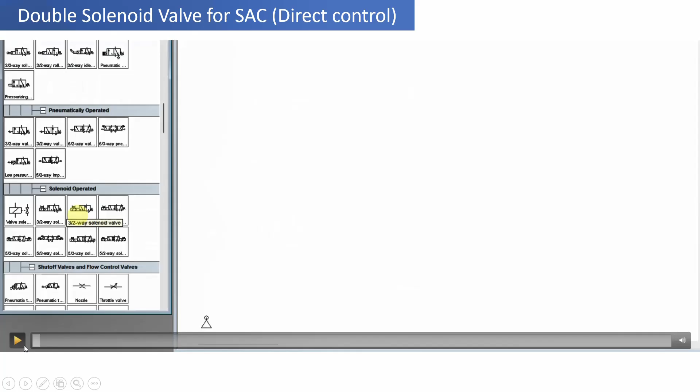So we are having compressor, then 3/2 direction control valve, and then the single acting cylinder. Now left envelope mode is also solenoid controlled, and right envelope is also controlled by solenoid. So it is known as the double solenoid valve. Now let us start with drawing the circuit, pneumatic circuit as well as the electric circuit. Compressor we have already selected.

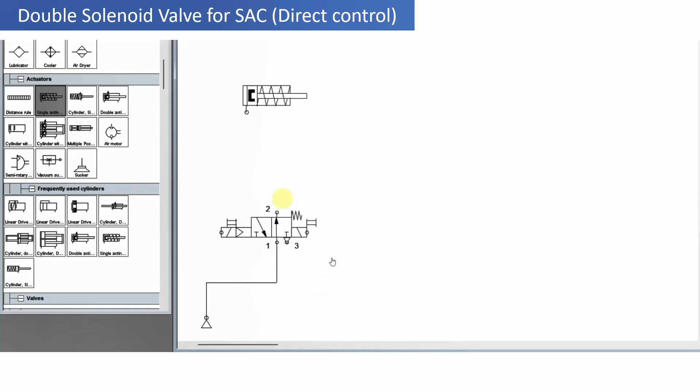Then we are having 3/2 direction control valve. Now we'll configure it in such a way that both the left and right envelope mode will have the solenoid and manual control configuration. Now select the single acting cylinder and then connect the ports as shown over here. So that will complete our single acting cylinder double solenoid valve circuit. Give the names Y1 and Y2 to the respective solenoids.

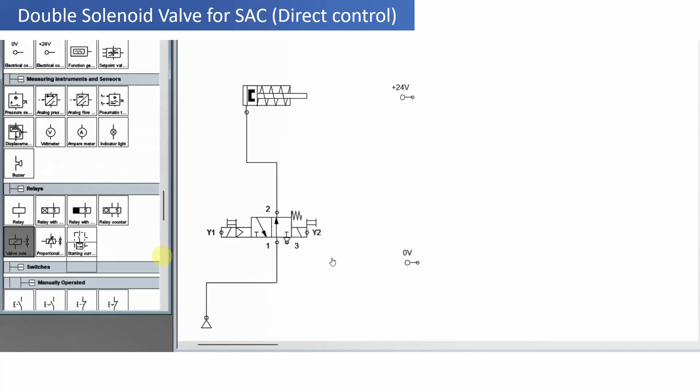Now we have to draw the electric circuit. So we'll select power supply elements as usual. Then we'll select the solenoid valve for both the operations of Y1 and Y2. So we'll give the labels Y1 as well as Y2 to these both solenoid valves, as you can see. Then we'll select the switches also for this solenoid valve. So push button switches are selected.

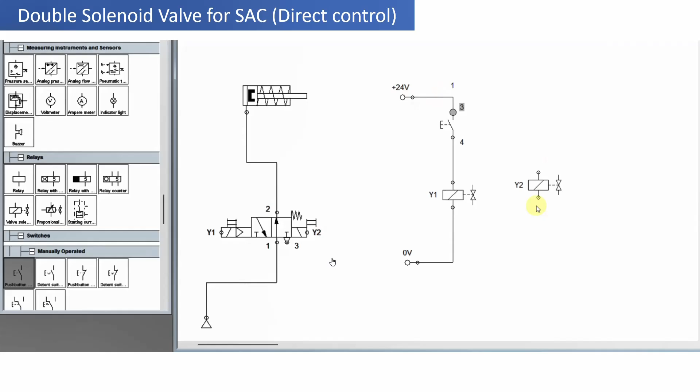Connect to the power supply, then the switches, and then again to the power supply. Same way, you have to select the switch and then make the connections as shown over here. Now we have to name the switches. So start switch S1, then start switch S2. S1 is for Y1 and S2 is for Y2 solenoid as indicated in the circuit also.

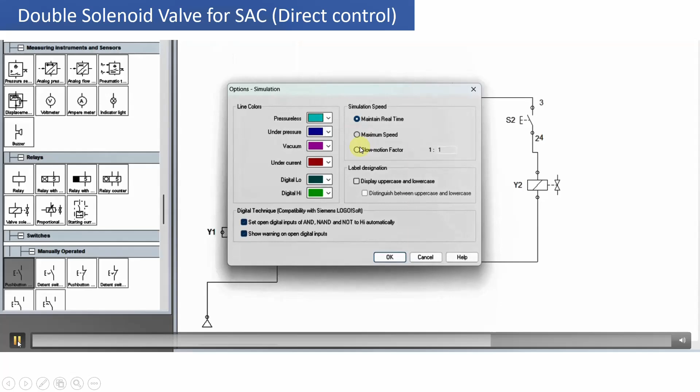Now we'll simulate this particular circuit. So as you can see, we'll change the slow motion factor so that we can observe the simulation properly. Now for this particular right envelope mode, the compressed air will enter from the compressor to port 1 and from port 1 to port 2, and then it will enter into the cylinder port and will cause the forward motion of the piston.

Now when you press the switch S1, the left envelope mode will get energized, and as you can see, it will be in the left envelope mode. Port 1 is blocked. The cylinder will be retracted. So this is the return stroke. The air from the other side will be exhausted through port 3. So the return stroke is now completed.

And then when you press S2, Y2 will get energized and you will be in the right envelope mode, and then you will get the forward motion. So in this way, both these solenoids Y1 and Y2 will be operated by start switch S1 and S2, so that the corresponding solenoid valve will get energized and will operate the left envelope and right envelope mode in tandem to get the forward and return stroke of the piston.

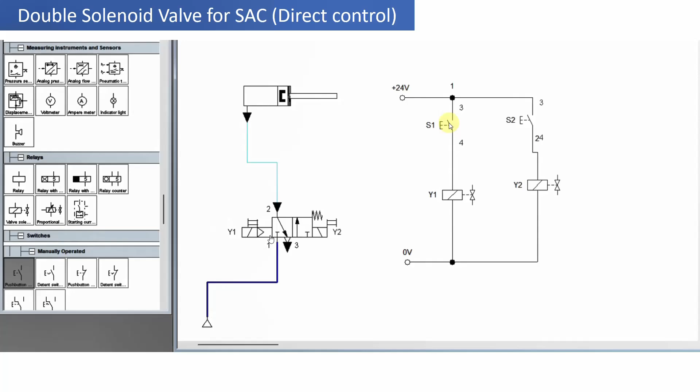So this is the working of double solenoid valve for single acting cylinder using direct control. We are not using relays over here, and therefore the circuit is known as the direct control circuit.